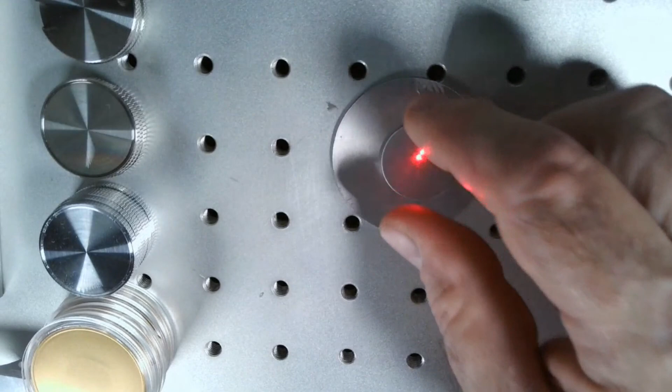Just hang on one second. You know what, I'll put one of the steel coins on here instead. It's Murphy's Law, anything that can go wrong will go wrong. And I know all about that when it comes to live streams. Let me get out of focus and back into focus.

And it wasn't a focus problem, it was just picking the wrong coin, I guess. Material settings match up. Let me put one on here that says in the description steel blank, so I know which one I'm doing. All right, put that in the middle and frame it. And now I'll get that into position.

We'll give this another run. I think that looks pretty good right there.

So now on this one, this is plain steel. I'm doing a white engraving on this. Yeah, now we're seeing something.

Just shows the importance of having the right settings for the right material. Exactly, yeah, that did nothing on the brass, but it would probably do wonders on the steel. I'm going to figure these out, don't worry about it as we go.

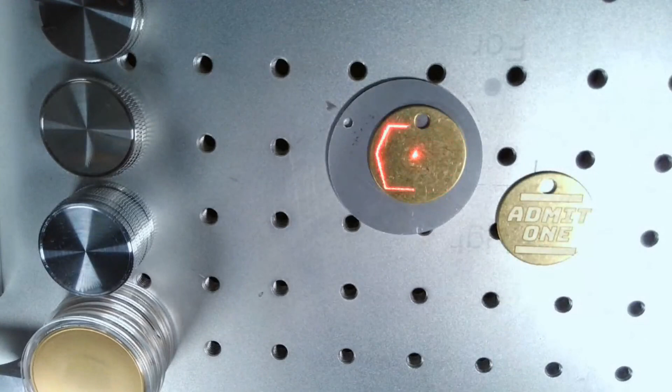This was how I was hoping it would come out, like that one right there. That's the one I did yesterday. And I have a couple of different settings, as you can see on those two. You can see the nice black line around the edges. So let's give this one a shot and see how it works, now that we've replugged.

Oh man, you're a genius, Patrick. Immediate difference, immediate. Now that's the same layer it was on originally that didn't mark it at all, if you remember. Okay, so that's so good to know. That's a problem.

Well, now I've ruined the surprise because you've already seen the final result on the right side there. And a lot of people are probably saying, why are you taking so long on this? You can probably do that in one pass. Maybe you can, but I want to get it really clean, so I'm doing several passes here because I want it really clean and really defined.

So this is my final. You're only working with a 20-watt Raycus. Right, exactly. So how does that look? I mean, that looks nice. You really can't tell in the stream how good this looks.

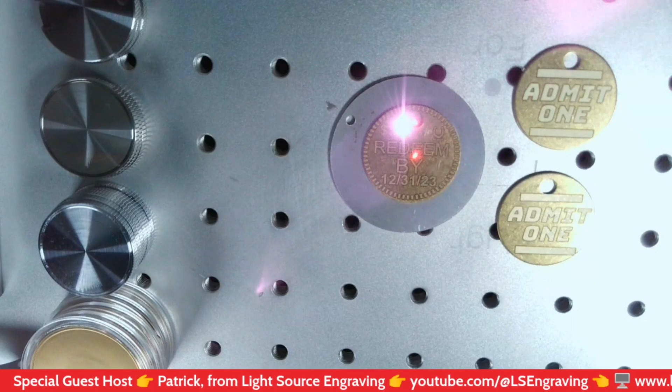I like to use multiple passes, and sometimes not crosshatch, just use auto rotate so it's going at some random angle every time it runs. That's when I'm doing a real multi-layer deep engraving, but for something more on the surface like this, you really don't have to do multiple layers and rotate angles. But by running it in reverse, like he has it set up, you can get a little different sheen and result on the surface. So what do you think about that?

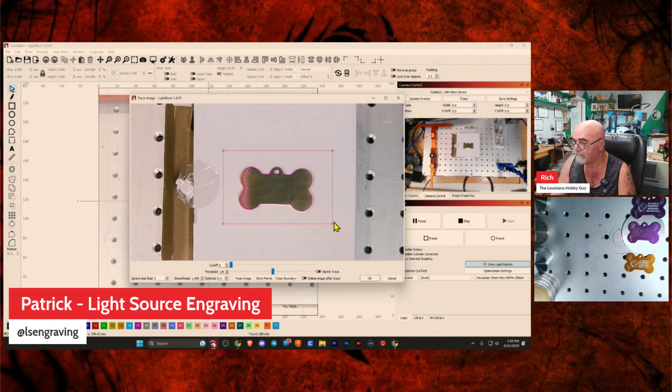I like to set whatever I want to trace on a white background, then hit trace, and zoom in, select which area you want traced, adjust your points. I normally fade the image, hit show points, and just like that you can get a decent outline of your dog tag. Just that simple.

But this is a camera that I have calibrated within Lightburn that's mounted to the galvo head. And that's it. That's simple.

But the main thing is to have your camera aligned and calibrated. You can use any USB camera, it doesn't have to be a Lightburn camera. I prefer a manual focus camera, I will say that, because if it's not quite in focus on your material, your overlay is not going to be perfectly lined up.

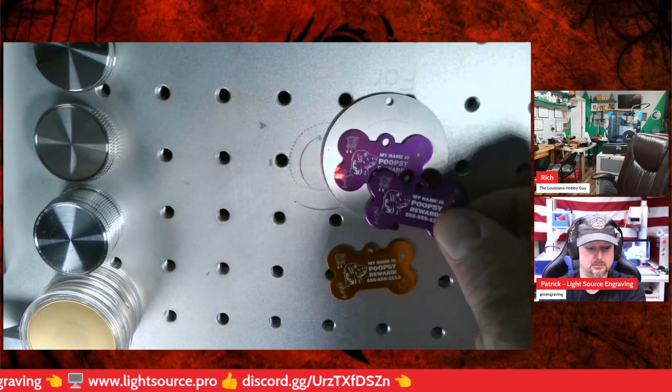That's much better, don't you think? I don't know what happened, I guess when I closed Lightburn I lost some of the settings or whatever. But that is exactly the way it came out yesterday, and all I did was reapply the settings. Come on now, all I did was reapply the settings to the layer. So that's kind of weird.

All right, so with those done, let me get those out of the way. I'm going to switch to a name tag.

So I had a question about watts, from 20 to 100 watt. Like Rich's 20 watt laser, it has a very low peak pulse power, and then of course it's only going to output 20 watts. When a Raycus 50 watt has a higher peak pulse power, you're getting the 50 watts out of it.

Most of the jobs that I do, I can do with my 50 watt Raycus, it is just fine. You would think it as the budget laser source, it costs less than a JPT. Normally a 50 watt JPT versus a Raycus, you probably save about $1,000 on the Raycus, and it works great.

Raycus used to get a bad rep, but they improved years ago dramatically over the last probably 5 years, and they're just fine, they do great.

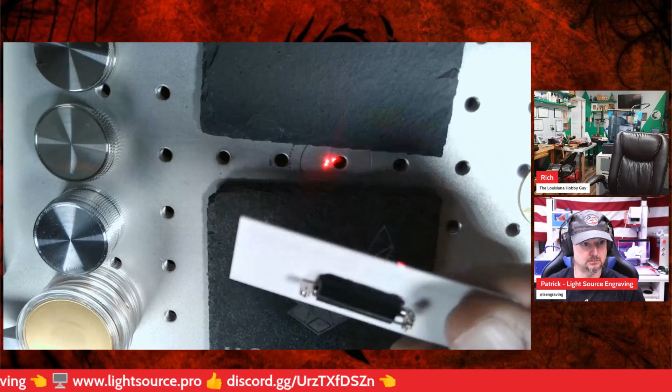Let me get this one off. I wish you could see this in person - it's a beautiful gold, and you can see that it's white underneath. I thought I got this from JP Plus, but this came from scottmachinecorp.com, which may have supplied them to JP Plus. It does have to be cleaned and wiped down, so let's get these off of here. Let's put this one somewhere in the middle and set the focus.

I've got my next project on the Lightburn workbed, which is going to be that same Louisiana one that we did earlier on the small coin, except we're going to be doing a larger coin. A larger coin - that's a good one. So we're doing a larger version of it. What made me say coin?

When it comes to... oh, go ahead. No, you go first, I'll answer the question while that's running. Okay, put the question up on the screen for the replay.

Do fiber lasers do any cutting or strictly engraving? A galvo fiber laser can cut, but remember the beam is originating at the center and is going to go to the outer edges of what you're cutting. So the cut line will be at an angle just because of the angle of the fiber laser beam itself. Plus, you'll have the shape of the beam at the focus spot that also adds an additional curve. So you're not going to get a straight cut edge like you would with a plasma CNC, water jet, or a laser cutter CNC. That's just one thing you have to keep in mind.

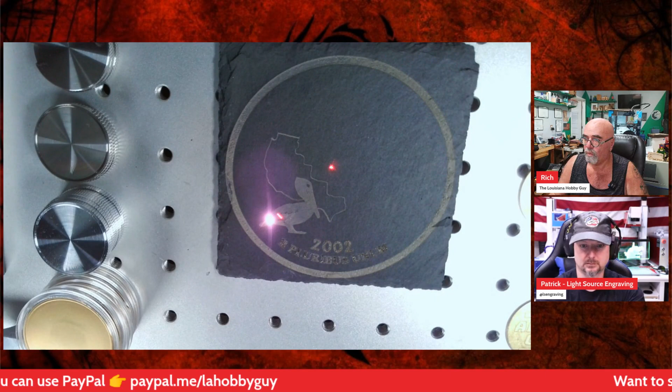To give you an idea of the settings on this one, it's just one layer at 2000 LPI with a scan angle of 45 degrees and a crosshatch. This has a lot of fine detail in it, and I wanted not only to take off the top, but I wanted it to go deep into the slate. This will eventually get a triple coat glaze over the top of it, so it will be perfectly smooth on top, the finished product, and it will also bring out the color, and that engraving will be deep, it'll have like a 3D look to it when you look at it. So there is method behind my madness, you might say.

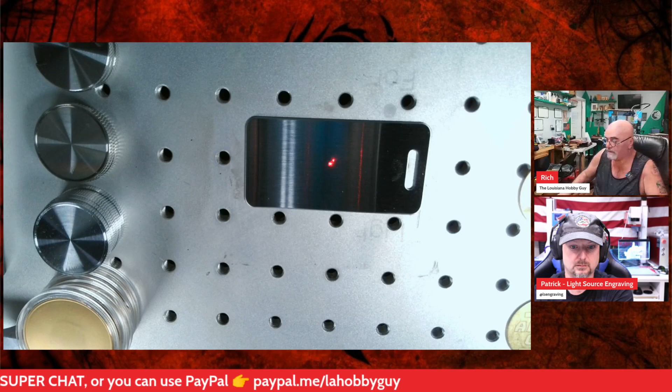That one is done, and we're going to move on to the stainless steel luggage tag, is the next one. I hope everybody's enjoying this. This took quite a while to set up, setting up all these graphics and everything. All right, so let me frame this one. This one I have to go, because I can't really see it in the camera, I have to go take a look.

This one's very hard to see with the camera because it reflects off of it, and I don't like reflective surfaces, even looking at the framing. If I put my glasses on, I can't see it. Hopefully these layers are going to be right.

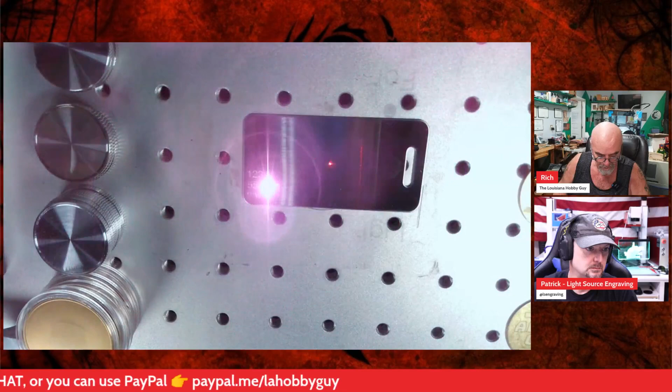That coaster didn't come out right. So this is the luggage tag, the stainless steel luggage tag done in white. I did it in black, but it was kind of hard to read, so I decided to go with white instead. This is what we're doing right now.

Now the settings on this one, let me find them real quick. I've got one layer on this one. It is a crosshatch, not bidirectional fill. Lines per inch at 2000, scan angle at 45 degrees, speed is 2000. Power is 95%, and frequency is 80 kilohertz. So those are all the settings for this. This is 304 polished stainless steel luggage tags.

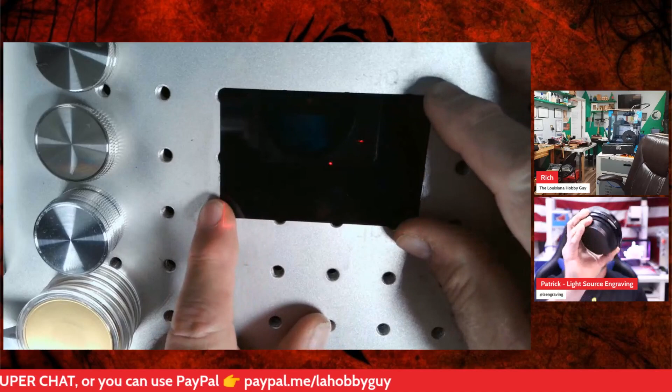All right, so I can't really see this with those lights on, I had to turn the lights off. So we're going to run this. These are actual real settings - this is actually for a friend of mine.

So if you want to know what these settings are, let's see. These settings are going to be the same on the top left corner for the logo for the State of Texas as the stainless steel. And then I have another layer on here for the rest of the card, that's the pink layer. All of the text on here is at a speed of 1,000, one layer, 90% power, 50 frequency, 800 LPI, and a scan angle of 45 degrees in a crosshatch.

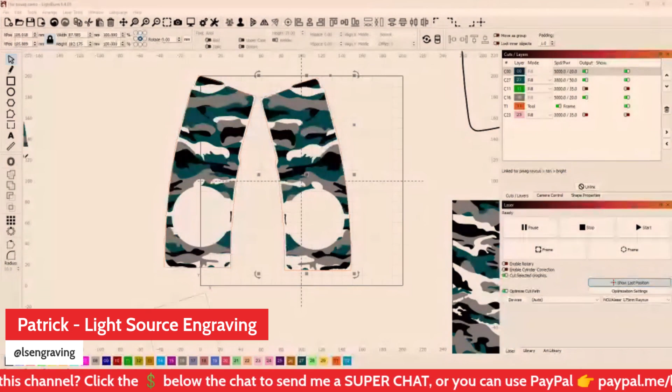Let me put this up in full screen so people can see it a little better, Patrick. All right, there's my PMAG template from the LMR video that's on Laser Makers Realm.

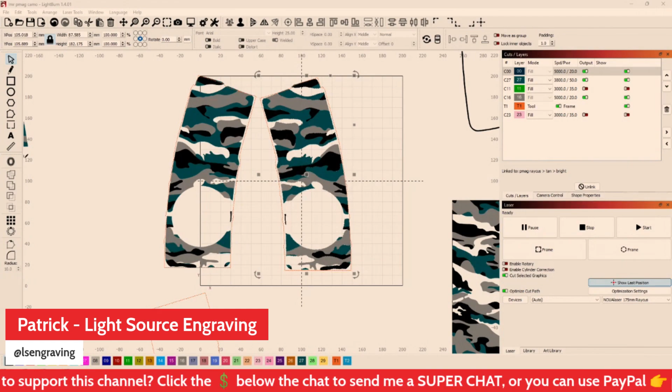Just so you know, there's no tomfoolery - this is fresh out of the bag. Oh, that fresh PMAG smell. It's amazing.

All right, let's see. What logo should I put in the middle of the PMAG? Any quick suggestions? I don't know, how about a tattered U.S. flag or something like that? I can do that.

Yeah Dave, I'll actually be doing one of those with the diode laser, but with this whole battle of the 20 watts I've just been swamped with work. I don't think I'm going to do too many more laser reviews after this because I really don't enjoy that. So I want to get back to doing what you're asking for - things people can actually use and do every day - and I've got to get through this battle of the 20 watts though.

I've got the assembly, I've got the testing, and I've had them all for a month or two now. I've got to swap between lasers, and I can only run 2 at a time in the other shop. So I'm running all the tests and putting hours on them, and I don't do these fluff reviews of lasers like most people do. I get really in depth and put a lot of hours on them.

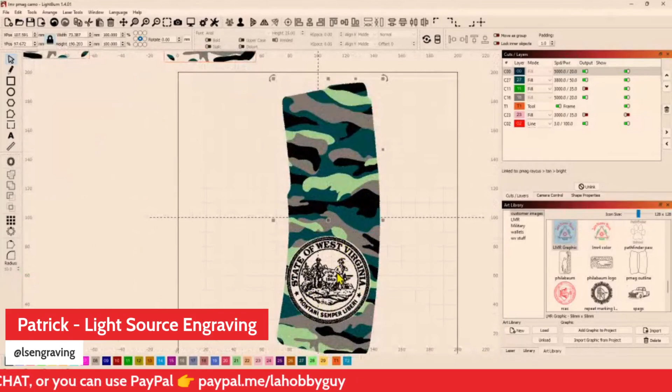So anyway, yeah, I will be getting back to regular videos soon, and I'll try and pop some in the meanwhile, maybe using the lasers that I'm testing, like I've been doing. I do have the new Lasermatic 20 on the way. That's going to be fun too, so that might be added to the list.

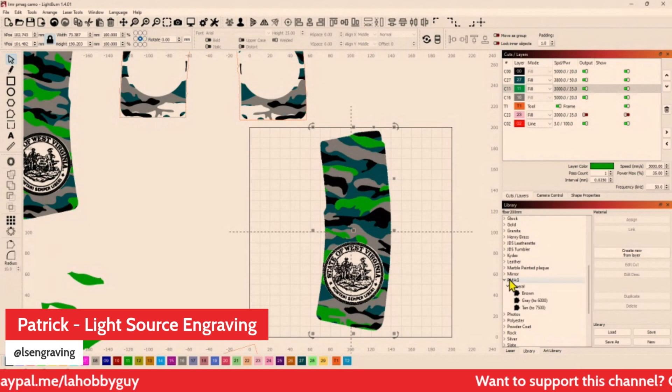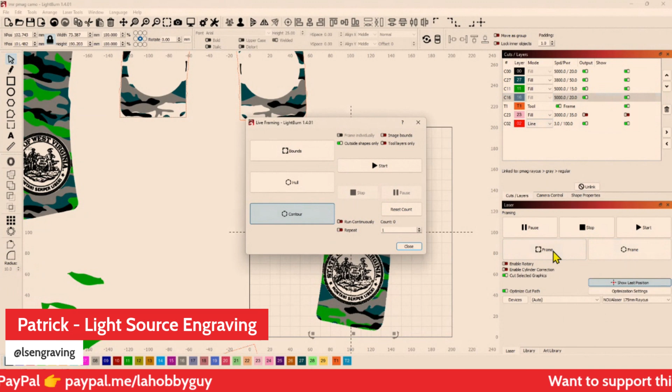So you guys know, on the Laser Makers Realm we will be doing an upcoming Lasermatic video where the three of us are going to have the Lasermatic 10 doing different projects, just showing you how easy it is to use and what a great job it does. I think I'm going to do some steel on that one as well. So there will be a triple challenge on the Laser Makers Realm with all three of us using the Rolly Lasermatic.

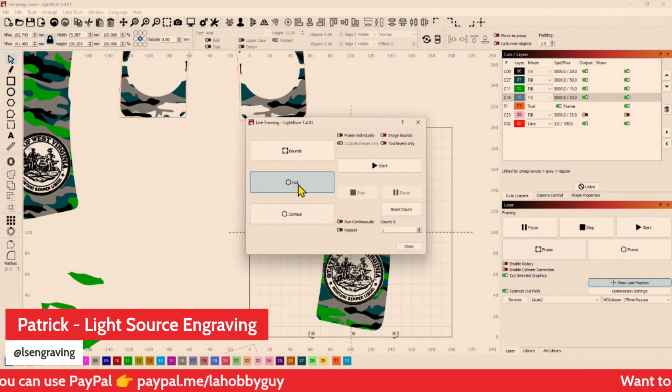Move my camera over and I'll show this framing. Chris is saying LMR logo was his suggestion. I kind of like that West Virginia one. 4th of July is coming. Okay, well he's got the West Virginia one on there now - that one was quick, just in the interest of time.

Yeah, I really like that logo, I think that's very cool. And being that we're short on time, it's probably best to do something that you can do as quickly as possible.

And here comes the magic, folks. Yeah, let's hope so - these PMags are really magic, and I trust that you've got it set up right, Patrick. I hope so, we'll see. But we did find out that different manufacturers use different polymers, so the PMags that I was using, that we were going to do an exclusive video on today, turned out to not engrave at all.

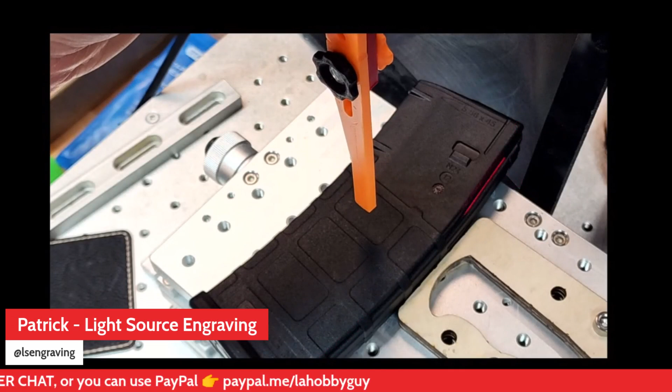It is, let's see. I figured out the problem - I'm way too high, way too high. I need to get down and focus. Focus, focus, focus. Yep.

Look, if you don't focus, it doesn't work. That's just a fact with any laser, it doesn't matter what it is. You have to focus accurately. I'm just using my little 3D printed focal sticks, I like those. I like the two little red dots, that works really well for me. And with my astigmatism I see 4. Yeah, and I've got that dialed in now.

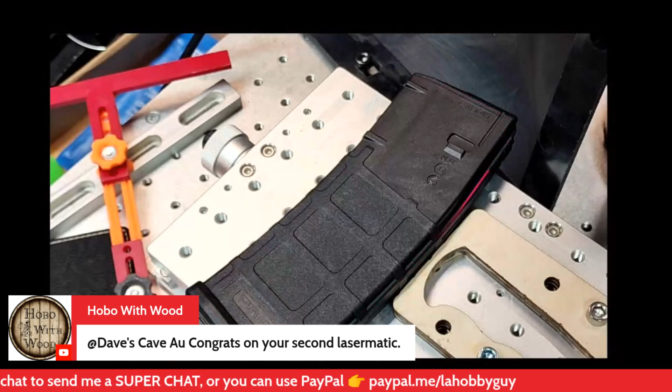So like I said, when I first started with this - oh no, it's the 20 watt. Yeah, I can't wait to get the 20 watt. But all three of us will have the 10 watt before long. Not that we're going to be promoting it on the channel, but we are going to do one video where all three of us are using the Lasermatic 10. I can't wait for the Lasermatic 20. And they do have the Lasermatic 40 in the works, and who knows what's going to come after that.

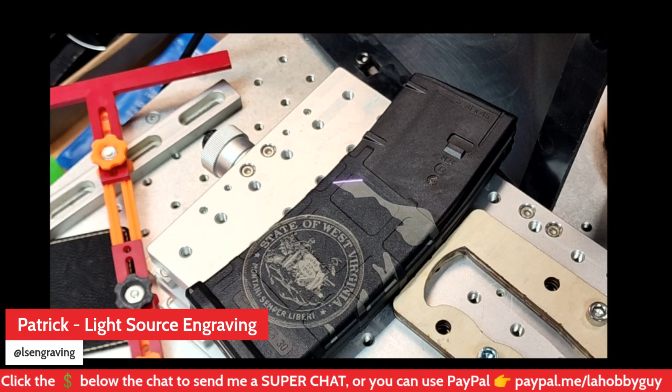I see that one manufacturer has already released a 50, and here's the magic right here - they've already released a 50 and they're planning on releasing an 80. So we'll see what happens. Of course, the higher wattage you get on these lasers, the less fine engraving you're going to get.

One thing I like about the Lasermatic 20 watt that's coming out - not the one I'm getting, unfortunately, I'm getting the beta version - the final version is going to have a switch on it to switch between 10 and 20 watts. So you can use your 20 for cutting and your 10 for your fine engraving. And the 10 has a much smaller spot size.

Fiber lasers are just magic to me. The type of detail that they do and the speed - this is an incredible amount of detail in that logo there. Yeah. Another version that I did, I had a photo of the West Virginia Capitol that I had converted to a vector, and then engraved that on a whole PMag, and the detail was just amazing.

You know, I was talking to Patrick about this, and I really couldn't find the brand on here. These were a wholesale deal that I got. Weren't they UTC? I believe they were. Yes, they are UTC. I got these - they might engrave, we just need more settings time testing. Yeah, and not being able to get the settings right, just weren't able to do that today. But look how beautiful this PMag, and I'll show you one that Patrick did for me when we're done.

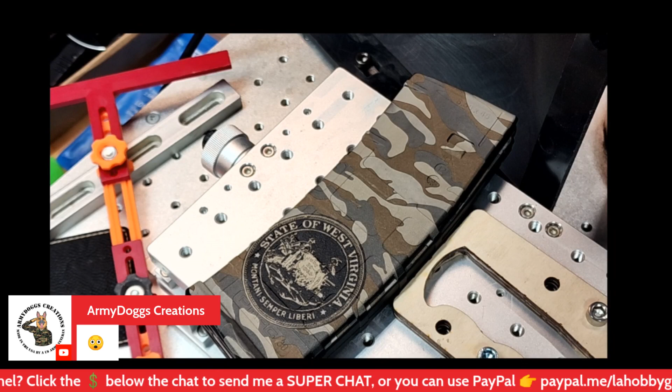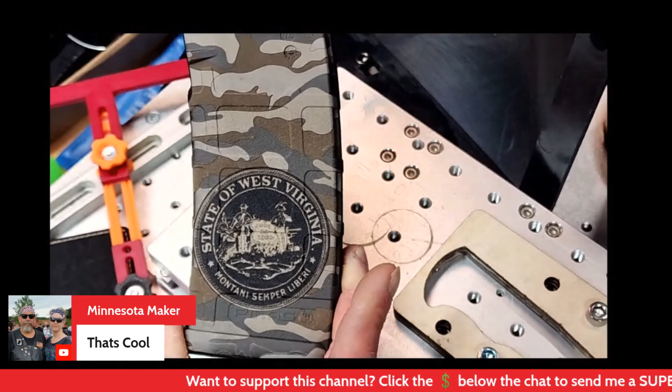So that's not perfect - it should have, looks like one setting got changed and I didn't have the gray in there. But yeah, there's a little gray in there. I think that just came out beautiful. Yeah, that's not bad at all, actually.

See it on camera - all right, so let me show you real quick what Patrick did for me. So these are the PMags that he sent me, and he put my logo in 3 colors on the back. And these are the ones that I got, so these are slightly different from the one that Patrick got. Different brand, different results in the material makeup. So I just wasn't able to get it to engrave at all, and I was able to get something out of Patrick's.

I got the Laser Maker's Realm one up there. Oh, there you go.

All right, so let's see - Minnesota Maker says he got his 50-watt fiber on the way, can't wait to start using it. Congratulations, you're going to love it. Don't worry about that first learning curve, you'll get through it. That first curve is going to be the worst, but you'll get through it.